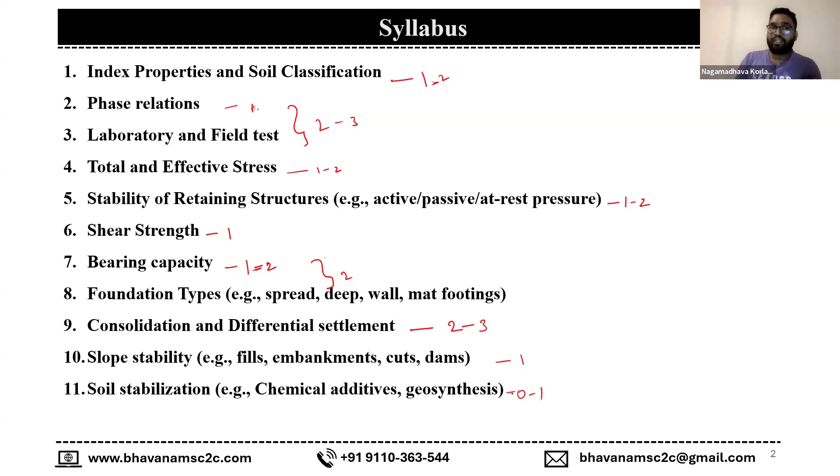But for consolidation, this topic you may get two to three questions easily. And slope stability - from the past 6 months, I think they're giving one question. For slope stability, you may expect 0 to 1 - it may not even come up. So looking at this, you can understand every topic in this subject is very important, and every topic carrying 1 or 2 marks is good.

If you don't understand one topic, or you don't feel confident in one topic, you may get marks from another topic too. But don't leave the first four topics, bearing capacity, and the ninth one, consolidation and differential settlement. If you understand these concepts, even if you're not 100% confident, you can eventually get marks from the remaining topics. That's the magic of this subject.

I believe you will get the maximum number of marks in this topic just by following some tips and tricks, and identifying the correct options by eliminating some of the unnecessary options, which was generally a trick played by the FE board for Geotech especially. So these are the breakdown of marks and your syllabus too.

So does anyone have any questions until right now, or should we just jump into the next topic?

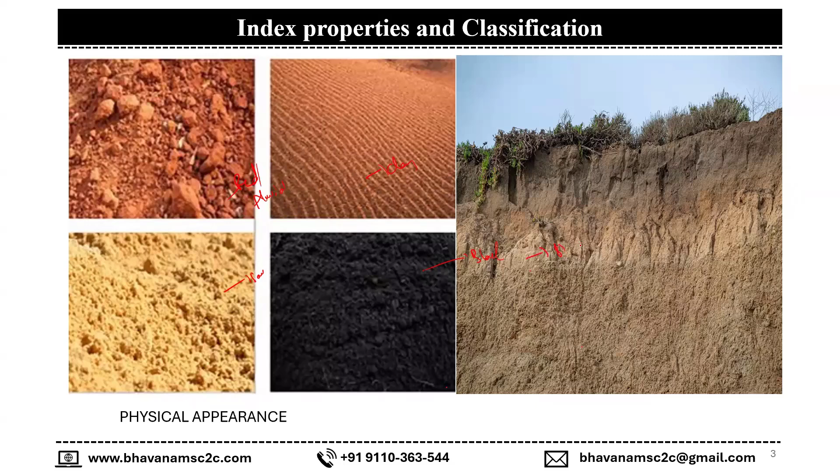Black cotton soil. Okay, this one is black cotton soil. The red rock, red clay, red or alluvial, right? Yeah clay. Obviously some kind of sand, some kind of murram or sand, something right? Clay soils, yeah.

So how did you tell this type of soil is this, this type of soil is this? By their appearance, categorized just by looking at appearance, at the color, you end up guessing some of the soils like that. But in real time, when you go to your field or your job, or you see samples of soil, it's not evident that every other sample you get is pure black cotton soil, or pure clay soil, or pure sandy soil kind of thing.

They are mixtures of soil. So up to one layer it may be sandy, after that you may encounter some gravel sand, like finer sands, and after that you may encounter some black cotton soil or something like that. In nature, if you go to a site, you may experience two or three kinds of mixtures of soil - some amount of clay, some amount of silt, some amount of sand, and mostly pebbles, some kind of coarse soil.

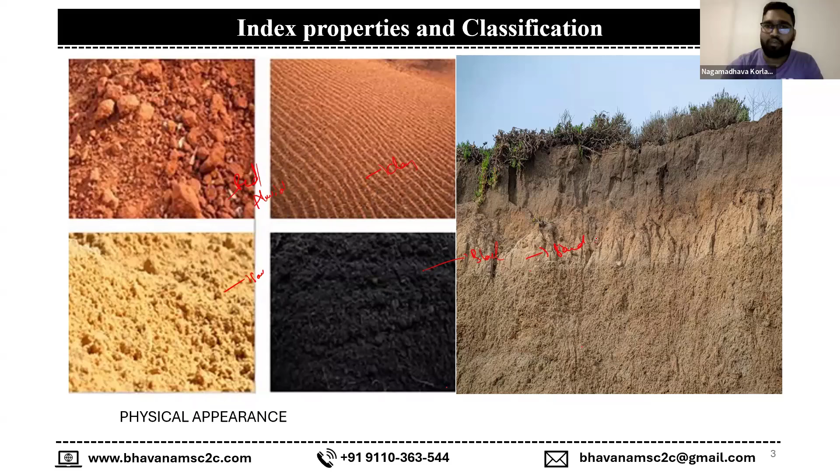So finding out those soil bearing capacities, we need the properties first. So how can we judge the properties of soil? We need to understand by physical means the compositions or properties of that soil. So first we discuss how to find out whether the soil is clay or something like that. So if you see, our first topic is index properties and classification. We understand the properties of soil, and we classify the soils. Which one is it? Is it gravel, sand, silt, or clay? We differentiate that.

So I hope, going forward, most of you know how to make a roti. Anyone, please explain to me how to make a roti. First make dough out of the powder, grind and sieve it. No, no, first you came to me, I'm the shopkeeper. Okay sir, perfect, go on Mohammed. Yeah, we have to sieve the grains first before giving it to the sir. We have to differentiate between the categories. No, I'm not talking about soil. You came to me, I'm a shopkeeper, I gave you some wheat flour, and you went to your house and found there are some lumps and some sand particles or stones in it. While sieving we do gradation first - we take different sizes and sieve it. Like for atta, for flour, we take different size sieves. If we found any lumps or stones in it, we take out the stones from that part. So what we'll do, we'll buy that wheat flour, and we take a sieve. If we find any lumps or something like that, we put that wheat flour in that sieve, and we sieve it. And whatever material passes through that sieve is the flour which is absolutely without lumps or stones or sand. That wheat flour we can use for doing rotis. And whatever the retained part we have, those stones and lumps, we'll throw it out. And then we'll add some water, until this flour turns into plastic state. Whatever flour correctly comes to that situation, we can do a roti or that mold kind of thing.

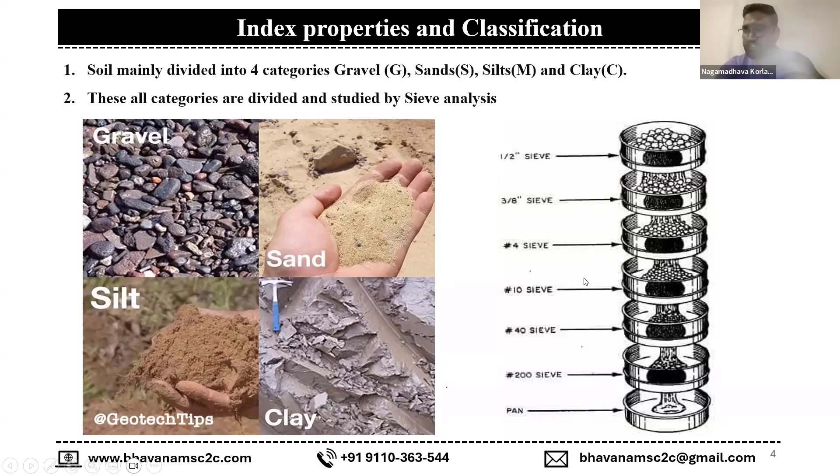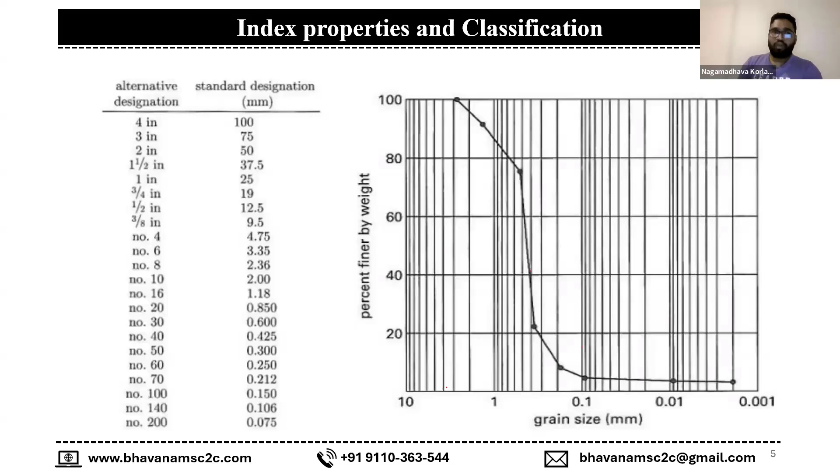Coming to coarser soils first, we do sieve analysis, and whatever percentage finer is passing from different sieve numbers, we plot that percentage finer based upon grain size, based upon the size of sieves, and draw a graph. Based upon this graph, we find whether the soil is well graded, poorly graded, or uniformly graded. Before moving into that, can anyone tell me what is number 10 sieve?

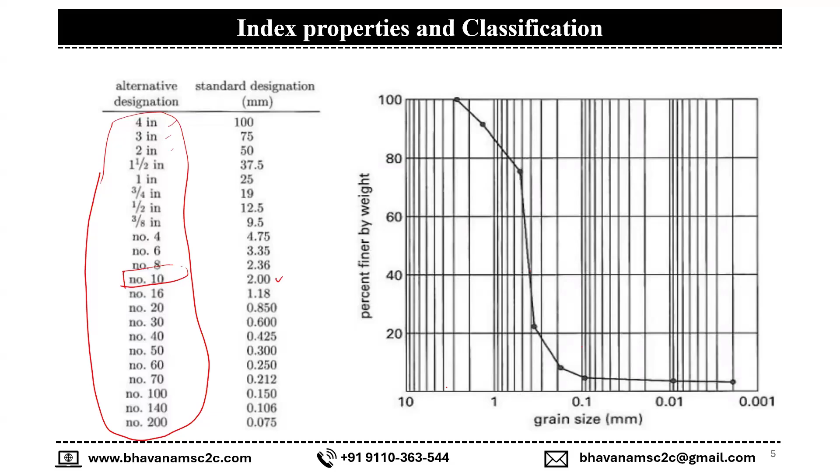Student: Sand, probably. No, I'm asking about the sizes of sieves we use for sieve analysis. I know what is 4 inch, 3 inch, 2 inch. So on a random note, I'm asking what does number 10 sieve mean? What does number 10 specify? Student: Particles of that size. Student: It has a 2mm opening. Number 10 refers to the standard sieve size. Okay, let me give you clarity.

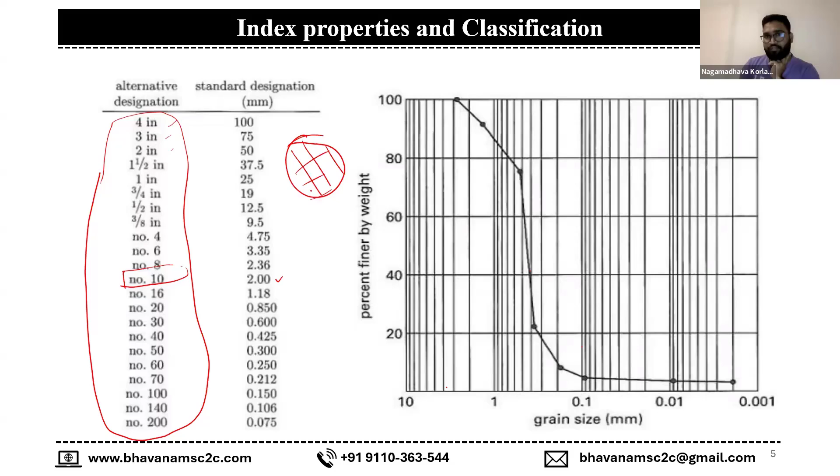Number 10 is nothing but, in a sieve, if you cut anywhere in the mesh a 1 inch by 1 inch square portion, you will find a minimum of 10 openings in it. That is number 10. If you cut that sieve 1 inch by 1 inch and find 50 openings, it is number 50. If you find 100 openings, it's number 100. But if you look at sieves labeled 4 inches, 3 inches, 2 inches, that means the opening itself is 4 inches across, not that there are 4 openings per inch. That's how we differentiate the sieves.

This is not a question for the FE exam, but it's a question for your interviews. What about number 200? If it's 200, and we cut a 1 inch by 1 inch section, there will be 200 openings.

So based on percentage finer, we plot a graph against sieve sizes. Generally, if you have soil in your hand and want to analyze it, a better way to understand this is with gravel. If you look at a truck carrying gravel, it generally has bigger boulders and smaller boulders, and the smaller ones can fill the gaps between the bigger boulders.

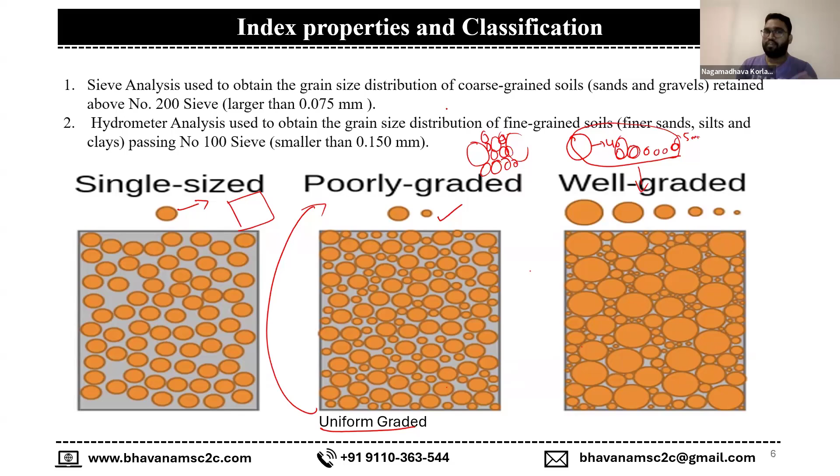Coarse grained soils are the soils retained on number 200 sieve. To analyze these coarse grained soils, we use sieve analysis, which we are doing right now. We have another set of soils known as fine grained soils, which pass through number 200 sieve, and we analyze them in a different way.

But you may encounter another question: how do you analyze these particle sizes, the grain size distribution, for fine grained soils? If the question asks how you find out the grain size distribution for fine grained soils, then it is hydrometer analysis.

We don't go into the deeper side and don't generally do hydrometer analysis unless it was a huge project where we want to know each and every thing exactly. Otherwise we don't do that; we just go by properties, which we are going to see in a couple of coming slides.

Hydrometer analysis is an experiment used to find the grain size distribution of fine grained soils. For coarse grained soils we use sieve analysis.

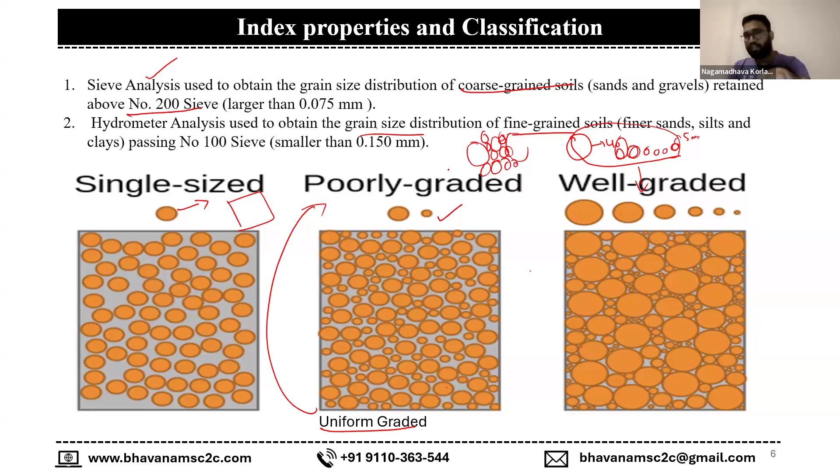So if you see this, this is well graded. If you look at the well graded soils graph, it has every other particle size, from opening to opening, in a set of percentages. But coming to uniformly graded, you don't have all these particle sizes of soil, yet it is still called uniformly graded, or you can call it poorly graded.

And you have another thing called gap graded. That means, say we talk about 40 to 5 mm, in between you may have 40, you may have 5, but you may not have 10 mm at all. So if you find that from here to here you've lost one set of particle sizes, this is known as gap graded. If some size of particles is missing in a soil, then it is known as gap graded.

In between, if you have every other soil size and good proportions, then it is well graded. If you don't have a few particle sizes, only having a few of them without good constituents or good percentages, then it is known as poorly graded.

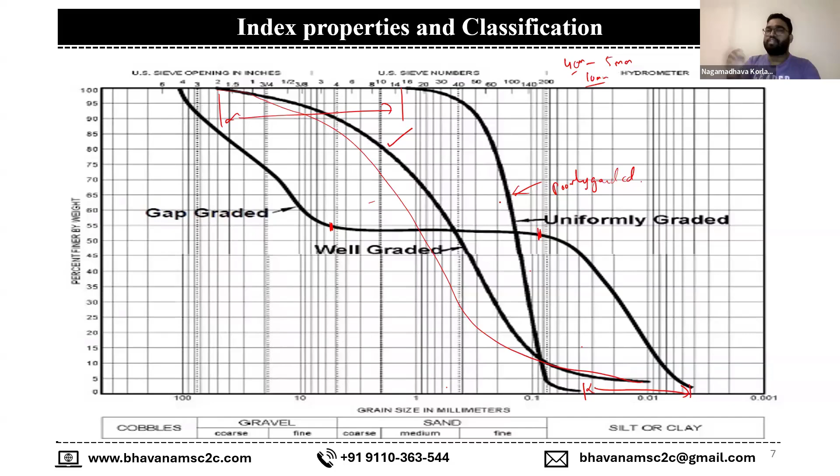By understanding the coefficient of uniformity and coefficient of curvature, we understand how the particle sizes relate to a given percentage we are looking for. So at 60%, we need to pass from a sieve; in this soil, 60% of the soil is passing from which sieve, or which number of sieve, or exactly how much opening is required to pass that 60% of the soil.

So we'll find the shape indices. These are known as shape indices. We understood how the general shape of the particles was present in this soil.

To find out the CU and CC, we need D60, D10 and D30. D is nothing but diameter in mm, and 60 means at 60%. After sieving, you plot the graph, and in that graph we take the 60% point. At 60, we draw a line to the graph, and draw a vertical line to the scale, the log scale we are considering. By taking this opening size, we understand this is D60.

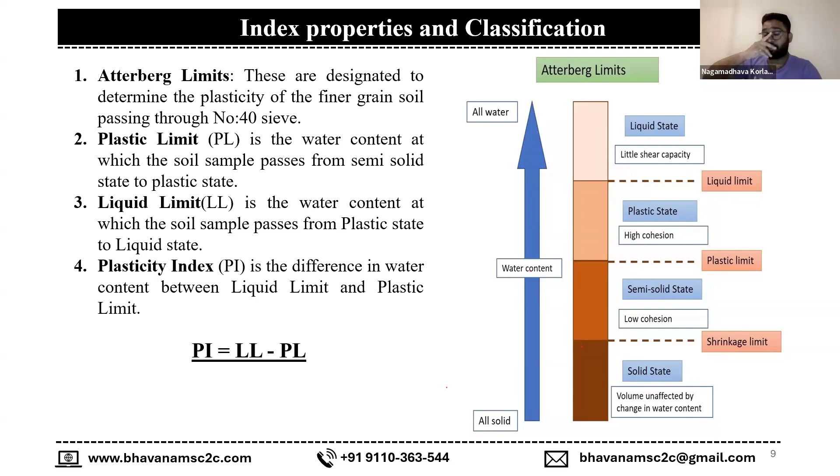And yeah, I have one question—Vishal, yep. How do we measure the plastic limit and the liquid limit?

We'll come into that. It's just, if you take soil and add some water to it, start mixing, and start making threads—if the thread is coming out at, say, 10% water added, then the plastic limit for that soil is 10%. You also check prior values like 9% or 8%. If you add 9% water and the threads are not coming, then your plastic limit is 10%.

Keep on pouring the water, and the point where all the particles in that soil become fluid and start flowing is known as the liquid limit. But for finding the liquid limit, we use another machine or experiment called the Casagrande apparatus.

You may remember that one too.

By doing a lot of experiments, we understood what is the plastic limit and liquid limit of that soil. But our job here is not to do the experiments, we analyze the results in FE. That's why I'm not digging deep into the experiments.

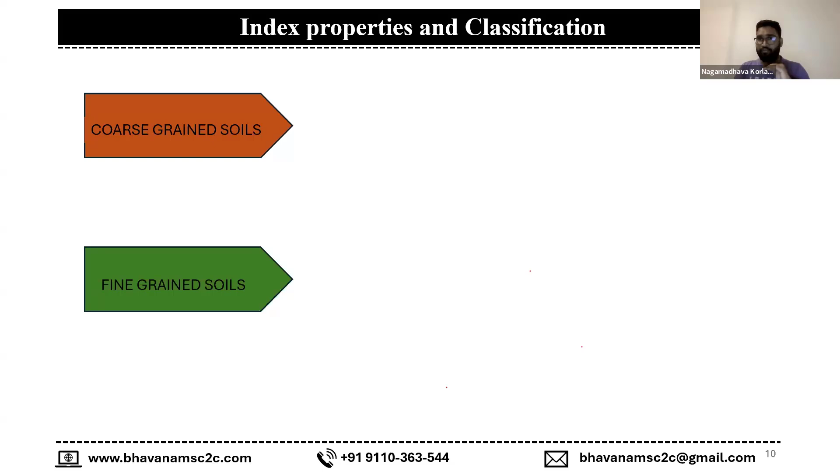The differentiation between coarse grain and fine grain soils is, if you take number 200 sieve, the soil which is 50% or more passing from the number 200 sieve is known as fine grain soil. The soil which is retained on number 200 sieve is known as coarse grain soil. So is that clear?

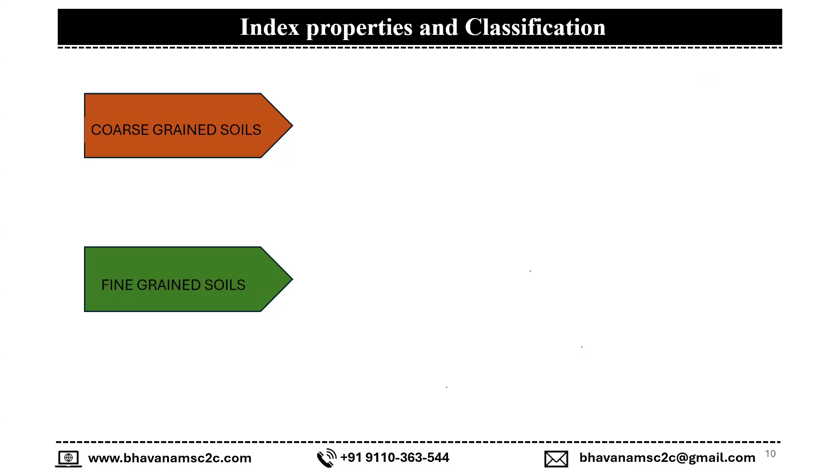So you're telling, right, both coarse grain soil and fine grain soil both gonna pass through this thing with the number 200? No, no.

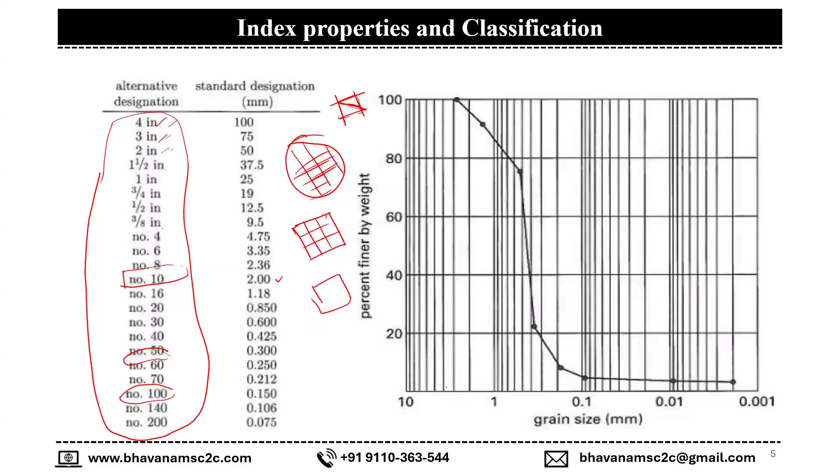See, if you take 100 grams of soil and put it in sieve analysis, the soil which is retained on number 200 sieve, whether it may be retained on number 100 sieve or number 6 sieve or 5 sieve, it doesn't matter. Whatever soil is retained above number 200 sieve is known as coarse grained soil. We'll again differentiate those based on the sieve analysis, whether it is gravel or sand. Number 200 sieve is the sieve which differentiates coarse soils and fine soils.

If soil retained in that 100 grams, if greater than 50 grams or 50% or more is retained on number 200 sieve, then you call it coarse grained soil. If the soil passes from number 200 sieve, you call it fine grained soil.

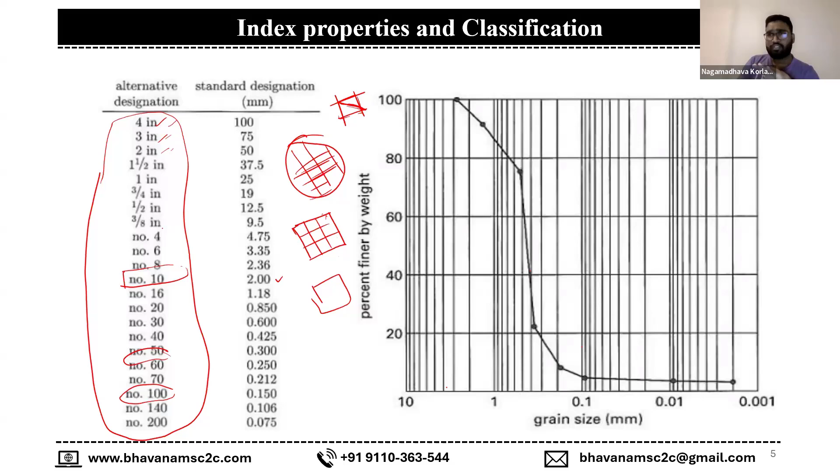Based upon other approaches, we differentiate whether it is gravel or sand, whether it is well graded or poorly graded. Whatever soil passes from the number 200 sieve, you again differentiate using the liquid limits, whether it is silt or clay, which is high compressible or low compressible. So are you clear?

Yes sir, yes sir. Thank you. So particle size having more retaining on number 200 sieve is coarse grained soil, passing from number 200 sieve is fine grained soil.

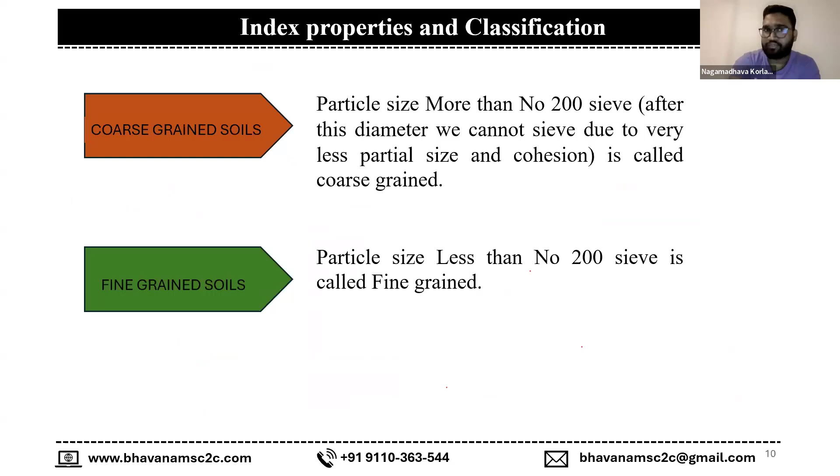Okay, these are all the things you will encounter in coming sessions, like coming day, like slides.

Gravel and sand are the coarse grain soils; silts and clay are the fine grain soils. You may encounter organic and peat in questions, but it was like rare occasions. If you find some statement in the question saying there is organic content or plant waste or some kind of thing, then you may know that it is organic soil or peat. It's a very rare condition. They're not gonna ask you what is organic and peat content.

If in the question they ask like there is some organic content or plant content, you may pick any one of those. I don't think both options will be in the question, either organic or peat. So you can pick from those.

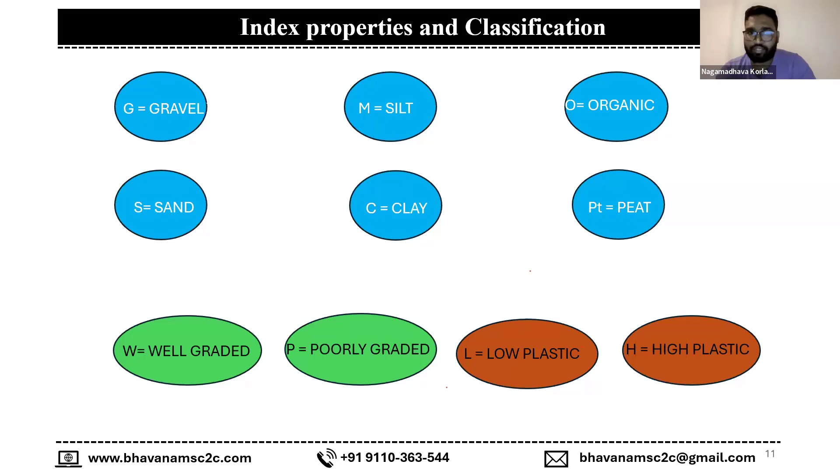And coming to the differentiation, you may see well graded and poorly graded, low plastic and high plastic. Okay, so we understand how all these coarse grain soils and fine grain soils work. Now we're gonna differentiate this. So we know what we'll do first.

We take the number 200 sieve reading. If soil 50% or more is retained on number 200 sieve, we call it coarse grain soil. If 50% or more passes from number 200 sieve, we call it fine grain soil.

For instance, we consider we took 100 grams of soil and we sieved it. So in this 100 grams, 80 grams was retained on number 200 sieve - that means it is coarse grain soil. 20 grams was passed from number 200 sieve.

Next, in this 80 grams, we look at number 4 sieve. If 50 grams was retained on number 4 sieve, out of this 80 grams, 50 grams were retained on number 4 sieve - that means it is gravel.

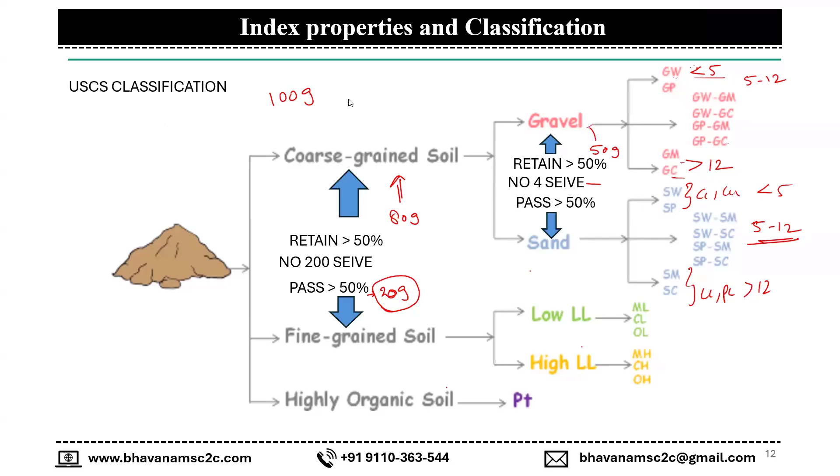Okay, yeah Mohammed, go on. Sir, how do you categorize like you said, 5 percentage? How do you make it, how do you know?

I categorize based on the USCS. This is the table you will see in your handbook too. We'll discuss it. Sir, what sieve number did you take to categorize it as 5%?

There is no confusion, here he mentioned less than 5% fines. Fines is nothing but fine grained soils. So whatever soil passes from number 200 sieve is known as fines. That's why I told you we took 100 grams of the soil. In this 100 grams, 80 grams is retained in number 200 sieve. So that itself is saying it is coarse grained soil.

But 20% is passing from number 200 sieve, which will significantly alter the properties of gravels or sands, or those coarse grained soils. That's why we'll find out, based on this 20% being greater than 12%, whether it is gravel, silty gravel, or clayey gravel. So this 20% is nothing but the percentage passing from number 200 sieve.

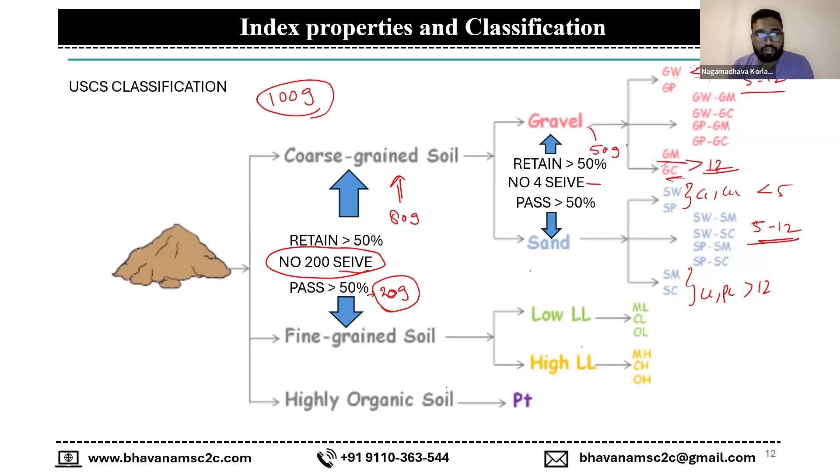This is 5%, 5 to 12%, 12%. Did you get my point, Mohammed? Thank you, sir. So next, we know if it is coarse grain soil, we understood how to find those things.

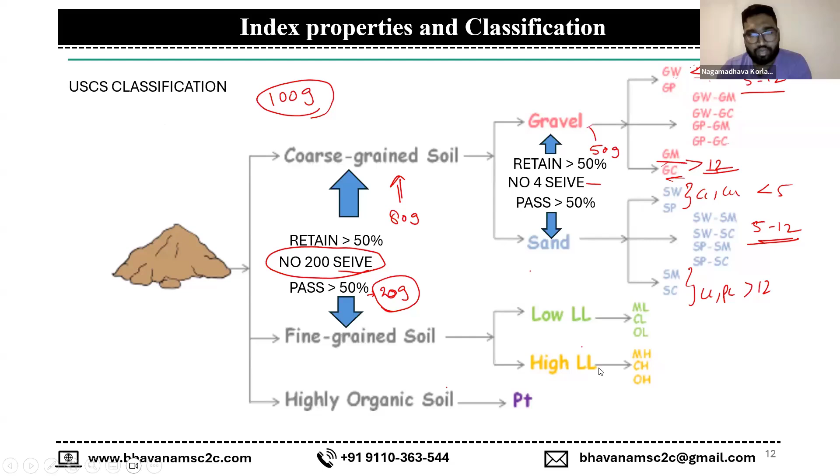But for fine grain soils, we have low compressibility and high compressibility. We already talked about what is low compressibility and what is high compressibility. If the soil holds a greater amount of water with it, it has more swelling and shrinkage nature. So if the soil's liquid limit is lesser than 50, then it is low compressible, whether low compressible clay or low compressible silt.

If that soil's liquid limit is greater than 50, then it is high compressible silt or high compressible clay. But here the problem is, if liquid limit is 50, we may get clay and silt, so we need to differentiate the clay and silts also.

So for differentiation of the clays and silts, we have a line called the A line. If we have the equation for that, when we are doing our problems, you will understand better. Based on your plasticity index and liquid limit, you will draw a line. If this point is below the A line, then your soil is silt. If this point is above the A line, your soil is clay.

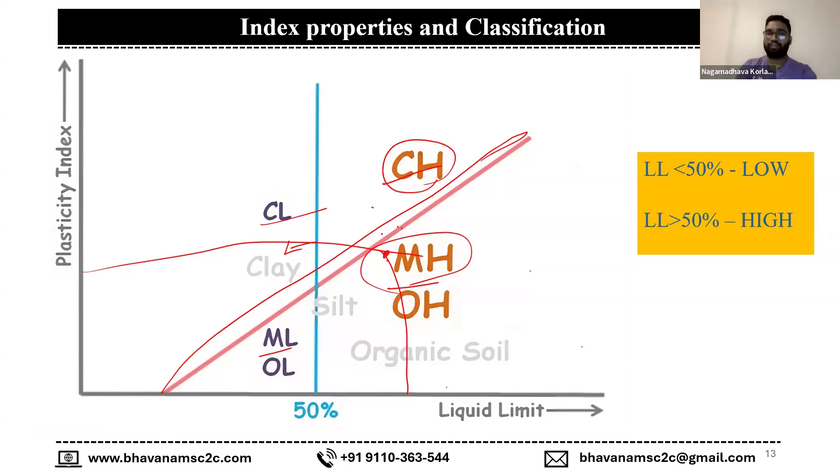So if your soil falls above the A line, it is clay; below the A line, it is silt. If your liquid limit is greater than 50, it is high compressible. If it is lesser than 50, it is low compressible. This is how we differentiate fine grained soils also.

Based upon these, you have the USCS classification. This is the one classification you need to understand. You may expect one or two questions from this whole topic. You may also be asked about AASHTO classification. AASHTO classification is nothing, for whatever tables you read in Geotech, just come from left to right.

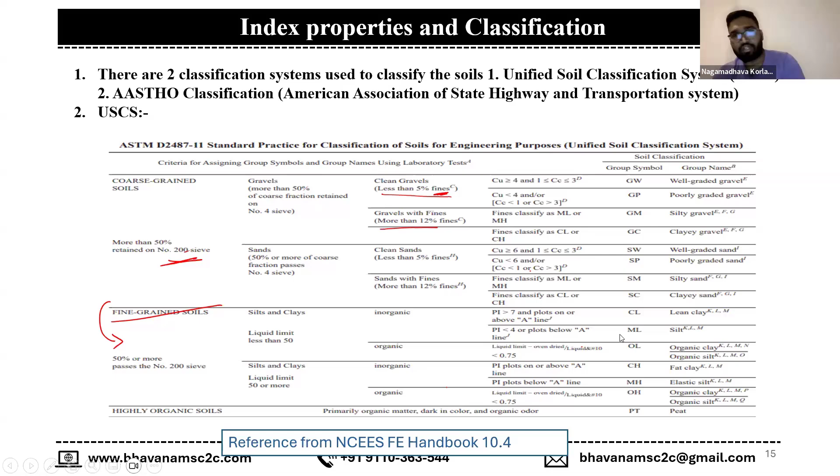Then coming to left, you'll come up with the group symbol. So if lesser than 5%, well graded, poorly graded; greater than 12%, it is silty clay or gravel clay, silty gravel or silty sand, clay sand or clay gravel. You need to mention it like that. And if you are between 5 to 12%, you will go for dual symbols.

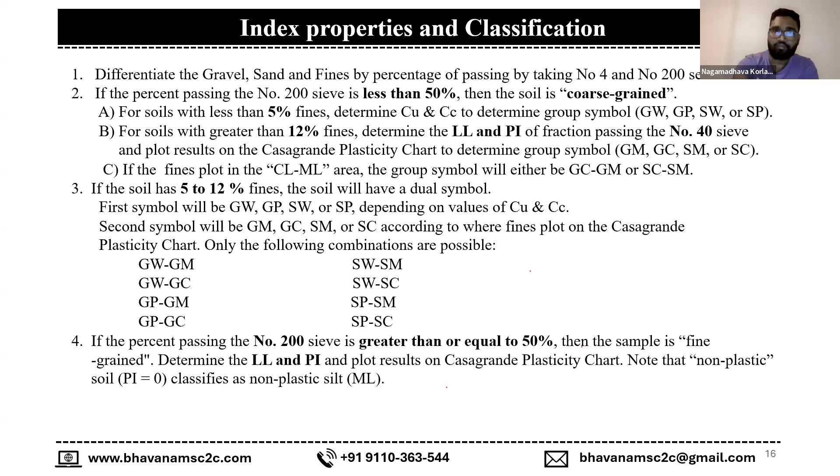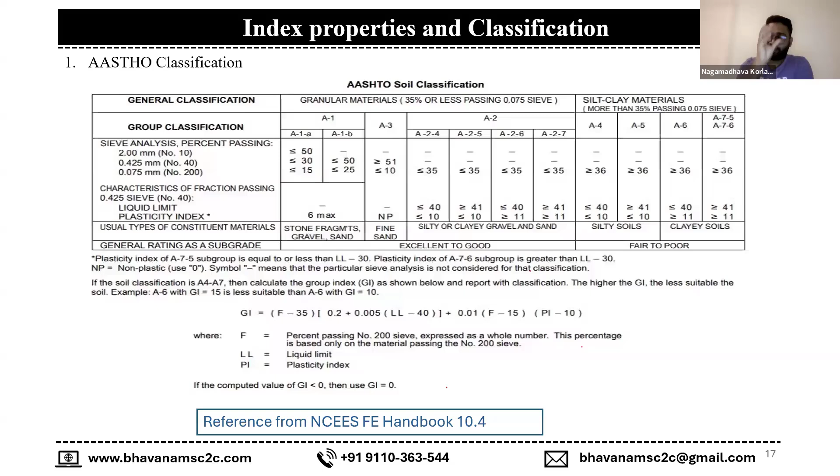Coming to AASHTO classification, they'll give some values. You need to check from left to right. Whatever the criteria it satisfies, you will come up with A1, A2, A3, A2-6, or something like that. Once we do the problems, you will understand tomorrow when we do around 8 to 9 problems, so you will understand better this AASHTO and USCS classification.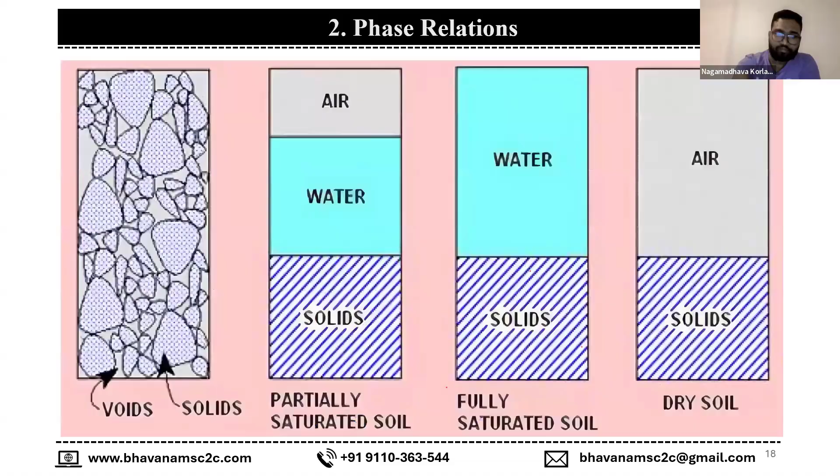Okay, anyone have any question? Chiranjeevi, I want to ask, do you provide questions to practice after your class? Like in class or after the class, as homework, sir?

Okay, so today no homework, and we'll discuss some problems tomorrow, so you get good knowledge on tricks and tips on how to solve those questions. After that, if time permits, I'll discuss some index properties tomorrow, so I can have scope to give you some questions as homework.

Okay, Madhav, thank you very much. So Madhav, I have one doubt. Sure, sure. In the beginning of the class I joined a bit late, so I believe you were saying something about theoretical or numerical questions.

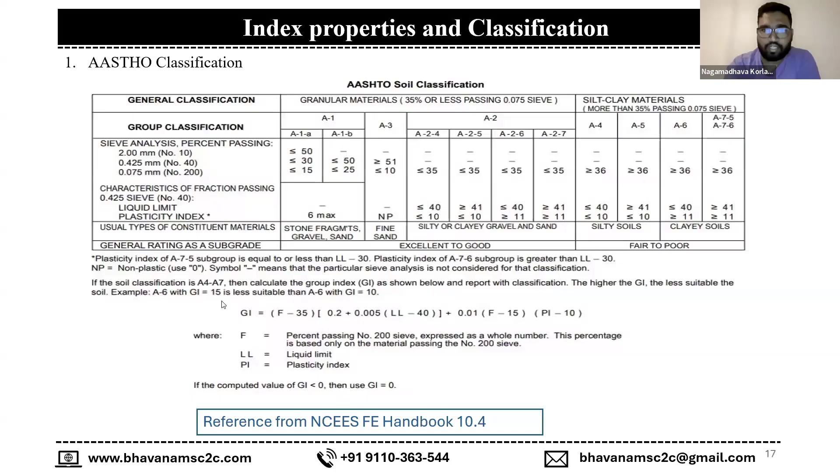Like how many we can expect. I think you've seen the breakup, right? No, I think I missed that part. Okay, so I said you may expect this type of numbers.

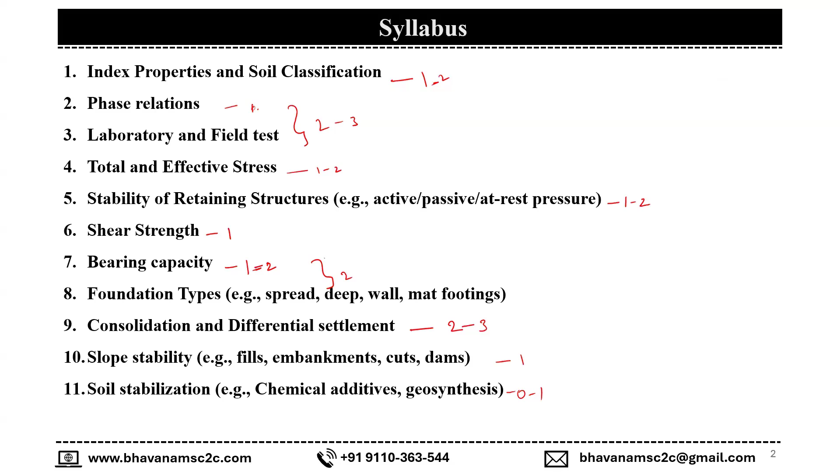But every other topic carries marks. So even if you don't understand one of those topics well, or you feel this topic was not your strength, you can still score 9 marks from different other topics. So if you find any difficulty understanding any topic, you can reach out to me any number of times.

And still if you have some issue, let it be - you may get other 9 marks from different topics. It is very much interlinked with other topics, but in the same way it's also distant from each other topic. For deeper understanding, you need to understand each topic as a subject whole, but for getting marks, you don't need to be that smart to understand everything.

You just need to understand what is the formula, what is the question asking, what we need to find out. The second thing that helps you in geotech is most questions, even if you don't have deep understanding, by looking at the options and using some smart thinking or simple common sense, you may end up understanding that one or two options are not correct, which is not practically possible.

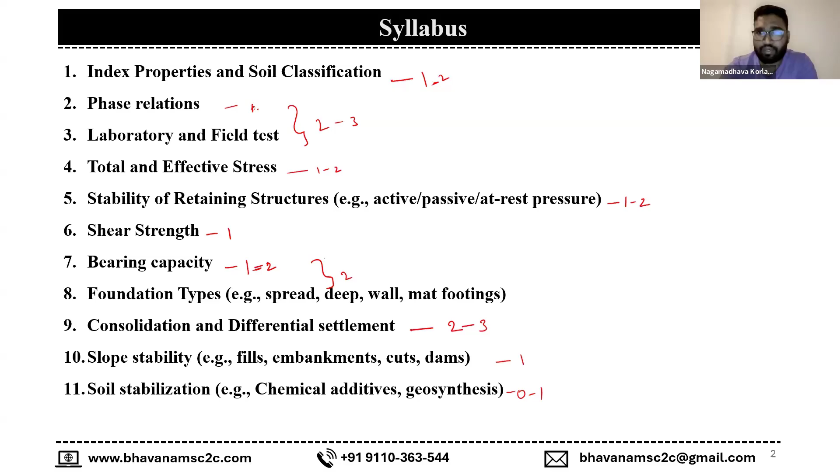That's how geotech works, and geotech works in FE too, so it's very evident you may get good marks in this subject. So how much weightage does this subject carry, like how many marks? 10 to 15 marks. Most of the times you may get 11, 12 questions.

You also mentioned that some code book or data handbook will be available for us. Yes, a handbook is available for you. And tomorrow when we are solving questions, I'll refer to those handbook numbers and pages, and how you can find some tips and tricks - you'll understand those tomorrow.

Sounds good, thank you so much. And definitely I'll change my name as you said. Thank you. You're picking the weapons, right, and you are just learning.

After attaining all the skills, you need to think about the strategy. First understand the subject so that you can prepare as per your strengths. Yeah, go ahead, share my plan and everything on the last class of Geotech.